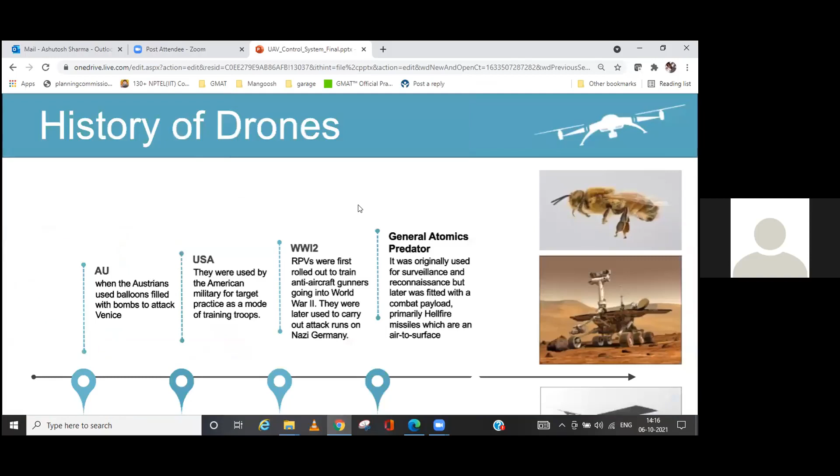Today I'm facing this many problems for the first time. Actually, I gave presentations at other places in my company as well, but I have not faced these problems. I'm sorry for the inconvenience. Okay, probably Zoom is taking a lot. Okay, so now are you able to see the screen or is it black? Black, sir. Yes, sir. Now it loads. Sir. Hello.

Okay. So let's start with the history of drones. The name drone came from honeybee drones, which go about their task mindlessly as they are controlled by a queen. There's an interesting book on honeybee drones as well, with the structure of the bees. It's one of the interesting books you should read while you're in college because it will open a different perspective.

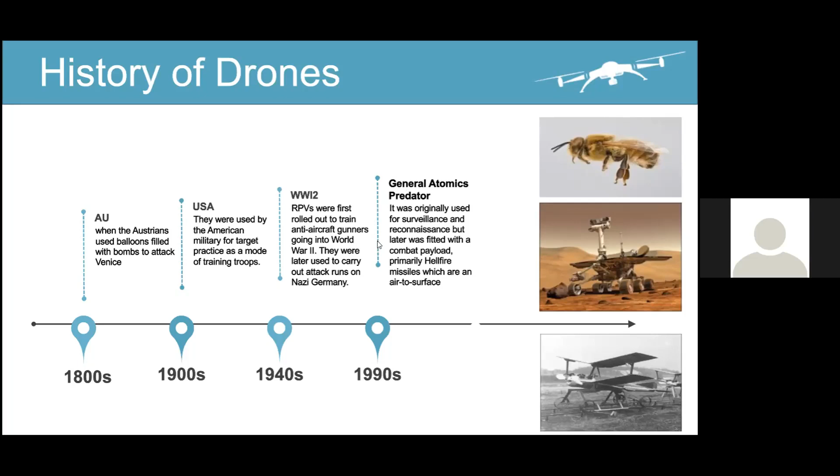Now we will see the different types of drones. We will try to brush through these slides, because these are very easy slides and most of the things are available. I will not go full screen because it is giving some error. We'll go full screen on some slides, because those slides are pretty important.

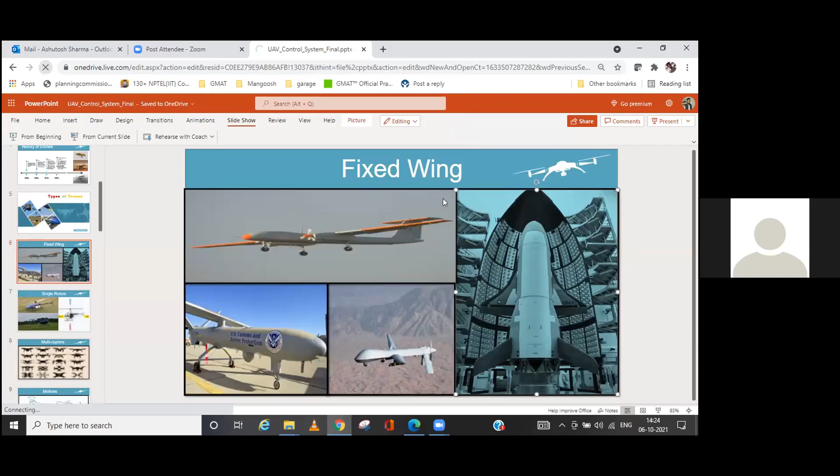Okay, any question till now? Any thoughts or questions? So how is this fixed wing drone different from planes? Yeah, airplanes, nice question actually. Yeah, so I just got one question, so I will answer that first.

The name of the plane which flies for 600 days is X-37B. Just search about it, okay? You will get a lot of information. Probably you will not exactly get what it is doing because we also don't know. But if you find, please let me know also.

So the difference between fixed wing drones and the actual aircraft is that you can't control the actual aircraft from ground, but with a drone you can control and do all the things which you can do with the actual plane, through ground. That's the only difference. Right now we also don't have enough capability to fly our normal aircraft through autopilot. Autopilot is pretty advanced, and there are many factors which come into play whenever we go for autopilot.

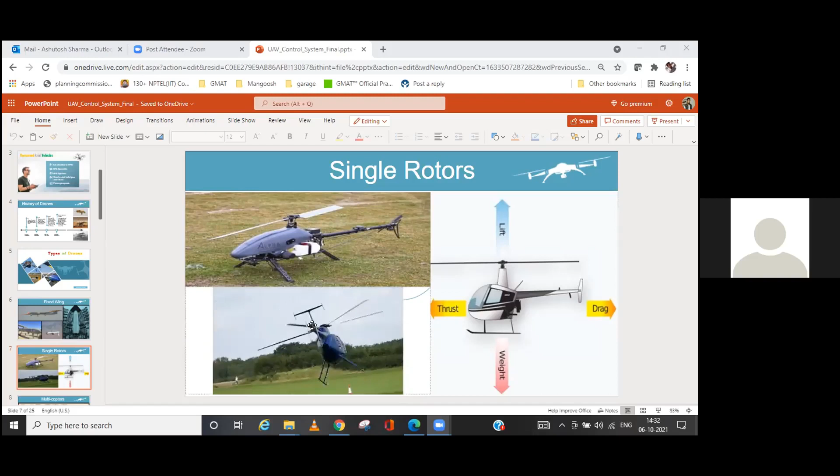Yes, nice. So there are many designs of helicopter. This is the standard one, where we have one rotor at the tail, but there are many designs in which you have a counter rotor at the top itself. You can check those designs. It's pretty cool if you want to see it. Okay.

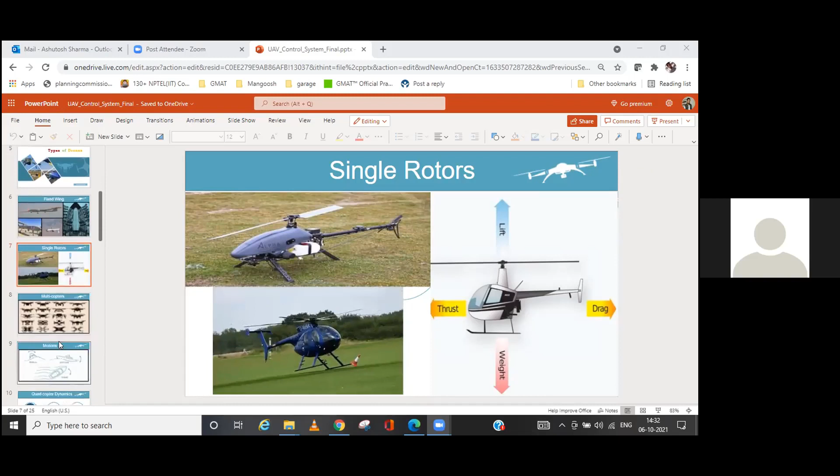So now the next one is multicopters. There are varieties of combinations in that. They are not just quadcopters, there are hexacopters; you can name it. I worked on one application where we needed to design a multicopter which can carry a certain amount of weight. We did the calculation and came up with 8 rotors being enough to carry that kind of weight.

But at that time the regulation was such that I needed to take permission to fly it. That was a different time, 2 years back. But now I think in a closed area you can easily experiment with it. So the configuration for your multicopter will be based on the application you are executing. Suppose you want to carry more load, then obviously you need more power.

Also, the different types of rotors will vary the weight as well as the size of your multicopter. It's all based on application. Suppose you want to shoot a wedding, obviously you don't need a big copter. You can go with a smaller quadcopter, but those are the minimal applications we do with multicopters.

To give more context, nowadays multicopters are used everywhere. Small copters are used for surveillance in airports and to protect leaders. When the prime minister is going somewhere, there are always drones roaming around his periphery to counter any drone attacks. So one of the important areas where people are working right now is how to counter drone attacks.

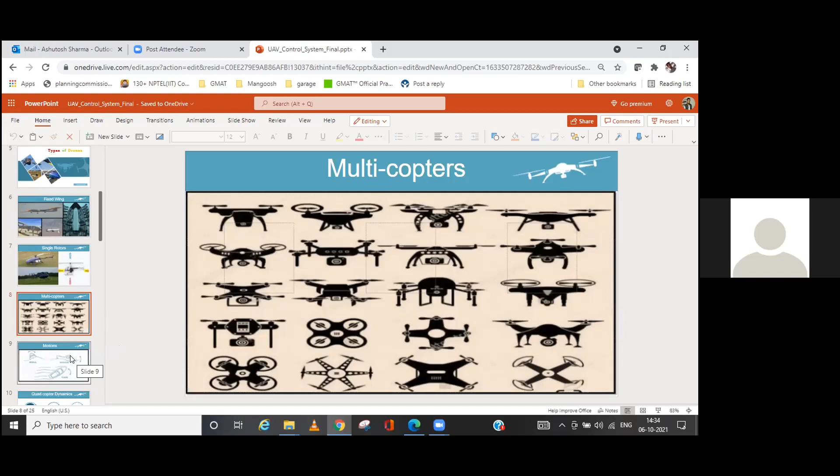So now the next slide is motions. There are three kinds of motions if you see. Why have I taken this picture? Because ultimately all these things came from sea only. So there is a roll motion - if you move in this fashion, that will be the roll motion. If you move up and down, it will be the pitch motion. Yaw will be this motion. We will see this in more detail in terms of quadcopters or rotors in the next slide. Just see this slide for 5-10 seconds to absorb it, because a lot of problems will get solved if we are aware about this concept.

Why are signal jammers or missiles not effective for anti-drones? The point is signal jammers will come into effect if someone is controlling from the ground, then the signal jammer will work. But suppose you have programmed your quadcopter in such a way that no one is controlling it, and it's set to go to a 100-meter distance and drop a bomb there - then a signal jammer will not be effective. Nowadays people are using very small drones to attack, so it is difficult to detect them itself. But there are some technologies already in place, not disclosed for obvious reasons, that can detect certain types of drones, but not all types.

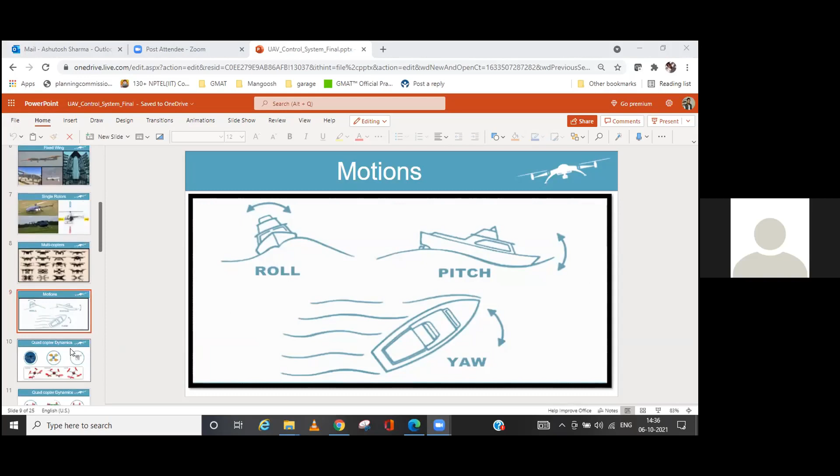Nice questions actually, Ayush. Pretty nice questions. Ask more if you have. I will try to give answers; if I don't know, I will come back with the answers later, I can mail you. That's not an issue. So next slide - think about this area, because how to counter the drones in the future, that will be one field. This is a pretty important slide. I will go to the slideshow.

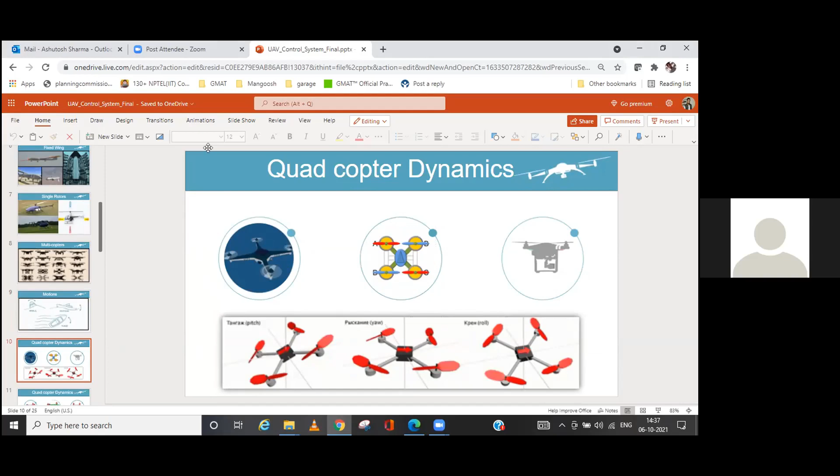One or two slides - I have put some gifs in this slide so it will help us understand. You can tell me also if I'm going too basic, but I thought it will be good. What about powerful lasers to eliminate drones? That is a good way of thinking, but what about detecting it first? We need to detect it first, right?

Abhijit, yes, detection is the crucial part. Eliminating, you can eliminate in any way - you can throw a stone also. Yeah, OpenCV you can use - image processing, I think you are talking about. Certain people are using it, but how effective it is, that still is in question. Also, your response systems should be quick enough to detect it.

I will give you one more interesting example. See, there are anti-missile systems, right? There are many anti-missile systems across the world, but are they effective? That is the question. Countries claim they are pretty nice and effective, but if you see, most anti-missile systems are not so accurate. Anyway, countries need to claim it works, otherwise it will be a threat to national security. Yeah, sure, deep learning is there, yes. Probably the answers lie in that field only, so you all need to search more. Try to detect it first, then elimination is always easy - there are 100 ways to do that. But detection is the problem.

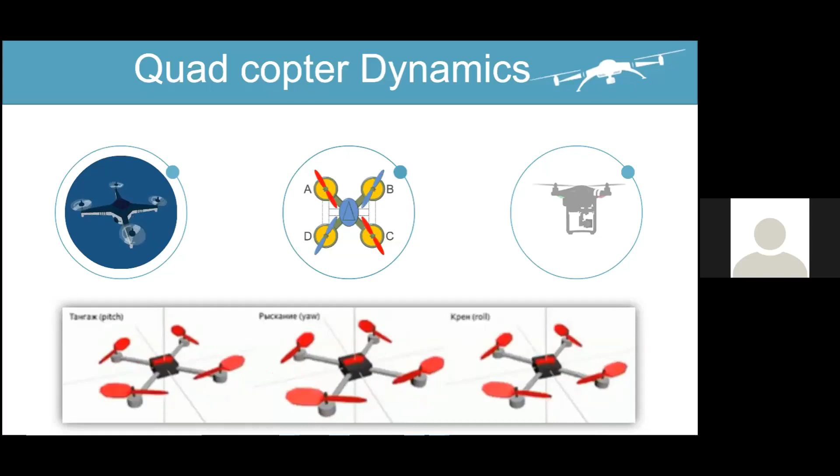I will add more things related to Israel. Actually, Israel is the top technologically advanced country in drones. If you see, there are many companies who are working in this field, and they are recruiting from India as well - that is one good news, one of the future prospects in working in this field. But see Boston Dynamics and see this Israeli company - I will give you the names. See their work, you can apply it also in future.

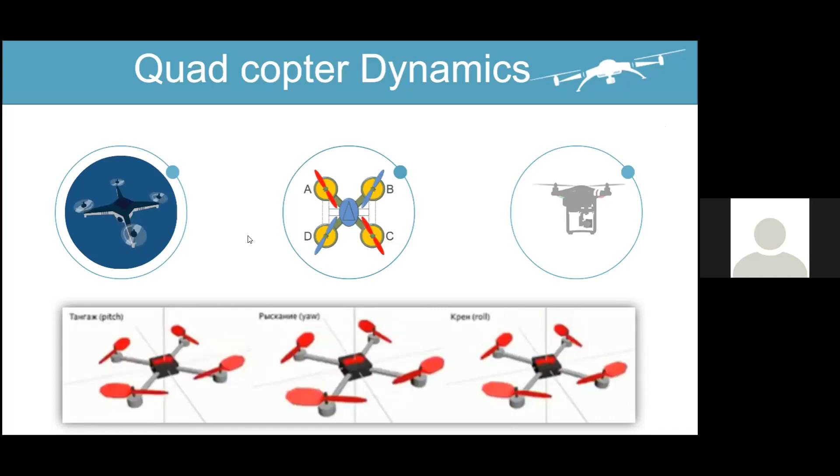Okay, so this is the slide. Ultimately, now this is pretty slow, that's why you're not able to see the GIFs are moving actually. So here I am trying to depict how you can hover these drones. In this slide I'm trying to show the three motions: roll, yaw, and pitch, and see the area where the forces are acting.

I think it's pretty evident from here itself. If you need to roll, then you need speed in these rotors and decrease your speed in this rotor. So the force will be higher in this area and your drone will roll. Now, in the same way, the pitch - I hope you get to know what is pitch from the last slide. Pitch is like if you're moving up and down, if your nose is moving up and down, that will be the pitch movement.

So how you can do it? If you have more force at the back from back rotors and less force from the front rotors - you can do it either by increasing the speed of the back motors or by decreasing the speed of the front motors. Yaw will be the sideways motion of your nose - if you are going from west to east, if your nose is going in that direction, that will be the yaw motion. You need to provide force in the opposite rotors, and the difference in the forces will create a yaw motion.

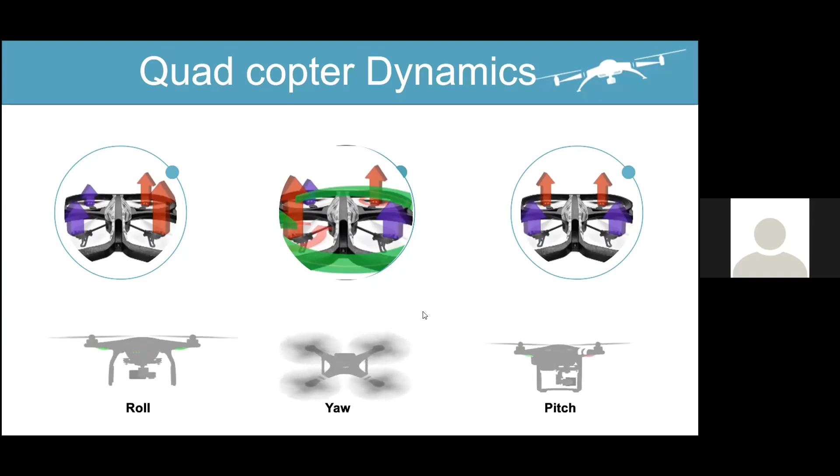Any doubt on this slide? Yeah, here it is more visible. Okay, how are forces given for yaw? What you need to do is increase the forces in the opposite rotors - this rotor, this rotor and this rotor - compared to these two rotors, so that will increase torque in this direction. This green arrow is showing the direction of force. So that's how it does the yaw motion.

Again, this is just related to quadcopters - the theory will change if you go to fixed wing airplanes. But I believe probably you people wanted to learn more about quadcopters, so I brought these diagrams. I can tell you about fixed wings also, that is also equally interesting. Does this answer your question, Ayush? Yes sir, thank you sir.

Yeah, so Amit also said Israel's Iron Dome - yes, this is the famous one actually. But Iron Dome is for, I think, missile systems, right? Not for drone systems. Let me check it. Okay, so again, this kind of thing is pretty doubtful - no country will come and tell us that their Iron Dome is not accurate, that will be too much. But this is one of the most difficult problems to solve - to detect, predict and eliminate a threat. This is one of the most advanced problems that human beings need to solve actually. We can talk a lot about this area.

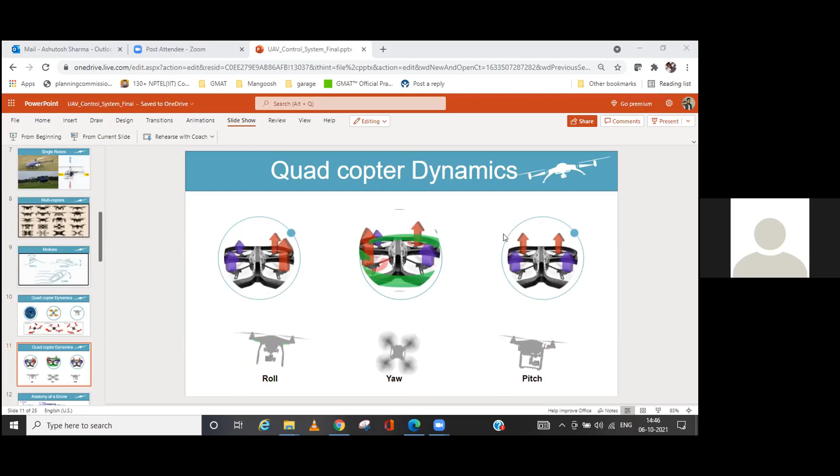If you see, there are already systems in place in different areas of the earth where they are expecting a meteorite strike. So they are planning that if some meteorite or something comes near the earth, they can destroy it. But they can't fully test it. It's very difficult - they can test it on smaller objects, but you can't simulate the real life scenario. Reading about all these things is pretty interesting, so I think you have a lot of material to discuss.

Okay, so next - this is the basic anatomy of a drone. Again, this is just for quadcopters, it will vary with different types of drones. But if you're seeing this as your future career, then we need to learn a lot about other types of drones compared to normal quadcopter drones, but we can start with the quadcopters.

So you can see there are a lot of things you are already aware of. The most important thing is - actually everything is equally important - but the brain of this drone is the flight controllers and the electronic speed controllers. Electronic speed controllers connect with flight control, so you can say electronic ESC is just a subsystem of flight control.

Like we discussed previously, there's a receiver and a transmitter. This makes this drone autonomous actually. Obviously there are different kinds of algorithms involved in flight controls which make it autonomous. There are many controllers given in the flight controls - there are different kinds of PID controllers involved in creating flight controls. We can talk about them briefly as well.

So there are a lot of companies working in this area trying to create electric drones in a sense. This Predator and other older drones are not working on batteries, they are working on fuel. So nowadays people are trying to come up with battery configurations which can be useful and equally effective as other types of engines, jet engines, which they mostly use.

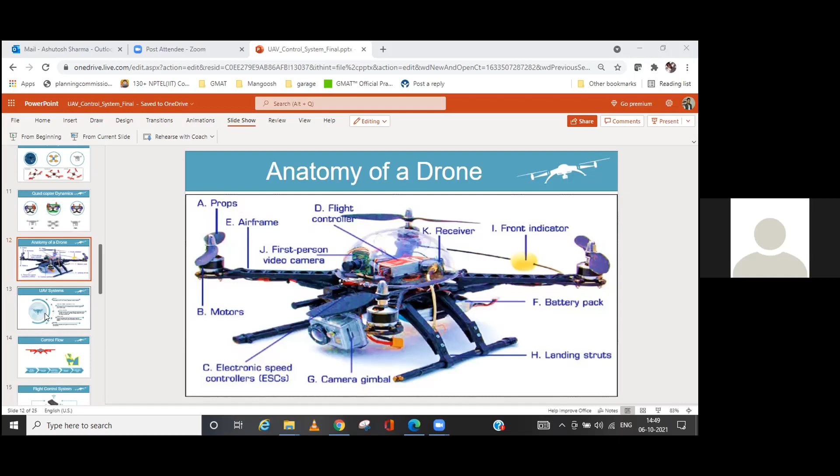Now coming to the next slide. So now the important, interesting, and probably most complicated part is the different types - what makes a drone is different UAV systems. So what different kinds of UAV systems do we have? That's what we need to see. This is not the exhaustive list, I should say, because there are many other components present in a drone, but we are just talking about this many because I felt these are more important to know compared to others.

So obviously we have mentioned motor - what kind of motors are you going to use, DC motor or AC motor? There are countless varieties. Like the electronic speed controller - what it does is simply control your motors, like we saw how your movement occurs. So who will reduce the speed of that motor? ESC will reduce the speed of that motor. This is the motor controller, in very simple terms, this is the motor controller.

And the flight controller is the main controller in the airplane as well as the drones. I work on flight control electronics - we divided flight controls into different subsystems. There are many subsystems like signal processing, signal integrity, and maintenance system. Flight controls is divided into many different subsystems. Autopilot is one of the most interesting subsystems. But are you aware that we still don't have a fully functional autopilot? Actually, we have a fully functional autopilot, but it is still not deployed in actual aircraft.

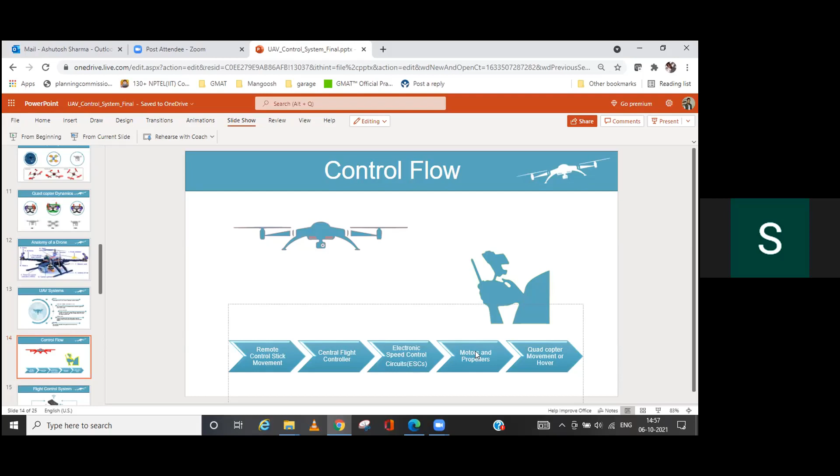ESC, sir. Yeah. Yes. So that will be taken care of by the ESC actually. How much power it needs to give to the motors, and based on the power, ultimately the forces will be decided, right? Because if you reduce the amount of power you're giving to the motors, obviously it will

slow down. Another interesting fact regarding motors: there should be a minimal power given to the motors actually, and there are different ways of controlling the motor anyway, that is related to the motor controller. But ESC is an interesting topic you can read about. Yes, ESC will control the power given to the motors and propellers.

Sir, can you please name a few flight controllers for controlling remotely using RC transmitters? Your voice is... Hello, is my voice audible? Can you repeat? Yeah, now is it audible? Yeah, it is audible. Tell your name also. Yeah, myself Kamal Nath, sir.

Hi, Kamal. Sir, can you please name a few flight controllers to control remotely from RC transmitters, like very good controllers with a stabilized mode, and any other controllers that can be used for autonomous drone navigation? So I have kept it for a later point, but it's fine. If you have asked, we can talk about that. So I thought I should bring it to your notice.

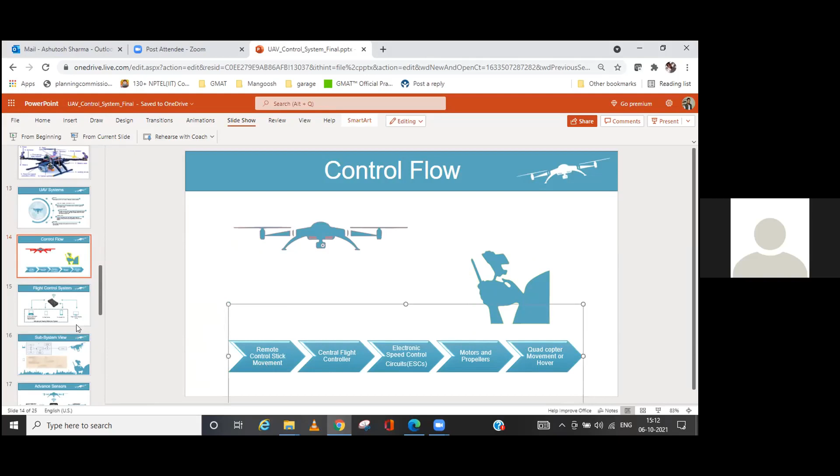So remember this. It's always necessary to know what you want to do. If you are building a system or an electronics product or any product, you should sort this functionality out first. The flow of your signals is the most important thing in developing any product. Okay. Next is the Pixhawk I use.

No, system engineers are not the same as mechatronics engineers. System engineers are, you can say, system architects. My job is to analyze all the systems. Suppose I am a system engineer, I will look into all the systems and come up with the solutions. And I will be giving requirements to mechatronics engineers to execute, telling them what to execute, and they will be executing it. But it doesn't mean someone is in a good or bad position. Everyone has their own role. Mechatronics engineering is also pretty interesting if you ask me.

So system engineering is like one level above, not in terms of seniority, but in terms of product development. That's it. So no one should think that system engineers are better or less than anyone. Every engineer is equally important. Yeah.

Yeah. Mechatronics engineers mostly would be working in, means you people are more aware about this robotics and other things. Okay, there is one interesting company. I got the call a long time back. It's Orange Tree, I think. Okay, search about this company.

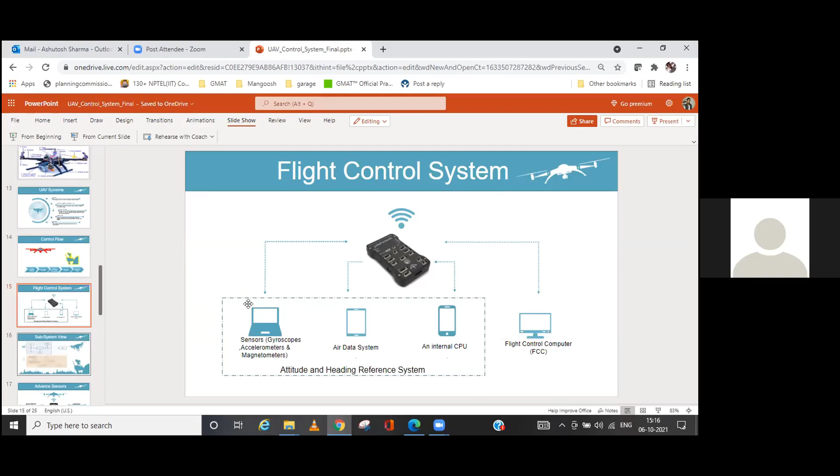Some drones fly in autopilot mode also. So there are different kinds of modes in the flight control: autopilot mode, altitude heading mode, different kinds of modes. Every mode has a different application. That is easy to learn actually, not a big thing. So this image is pretty important. Any doubt till now? These different images are just trying to give you different views of the quadcopter, how it internally works. Any question anyone has? Or I can move to the next slide as well if you want.

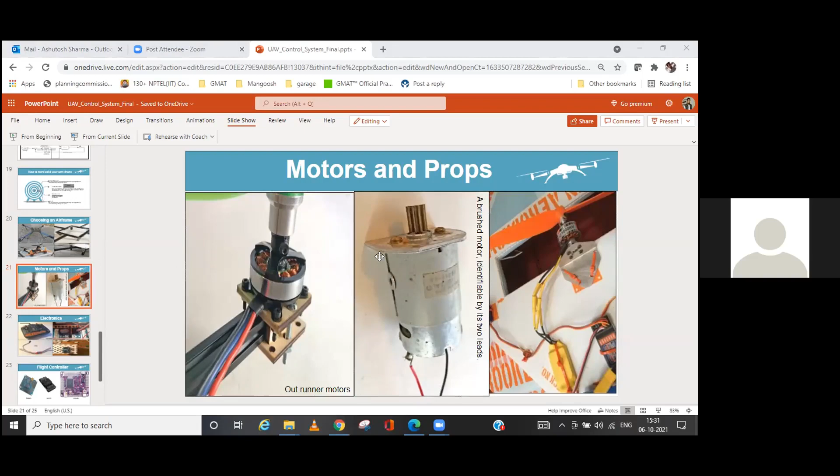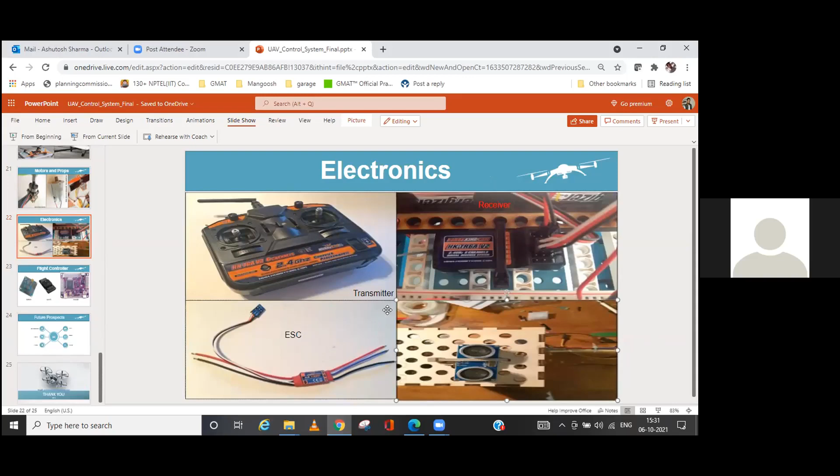So these are the electronics you need to see, again based on the application. All things should be compatible. I think we have seen this flight controller slide already. Which kind of controllers you need to use? Complexity matters.

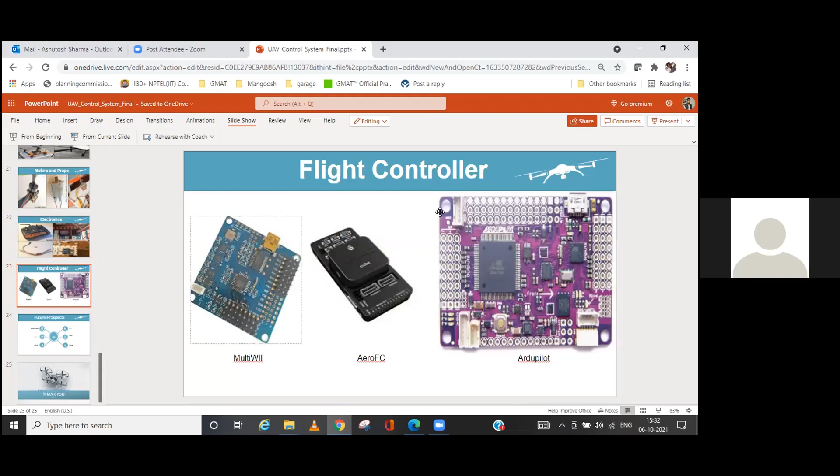Okay. Now I will talk about the future prospects. Okay, this is pretty interesting from your point of view. So there are many companies working in Gurgaon who are working in the field of drones, directly drones. In Hyderabad also there are many companies who are working in it. They mainly work in the areas of surveillance and in the field of agriculture.

I said Lilium, the Volocopter. There are hundreds of companies in Germany. A pretty nice environment is coming up related to aerospace, especially related to drones, unmanned aerial vehicles. Also, see, Boeing has acquired one company called Next. Read about that also. In Boeing, we have one division which just works on experimental design. That's called Phantom Works. Actually, you should visit that as well.